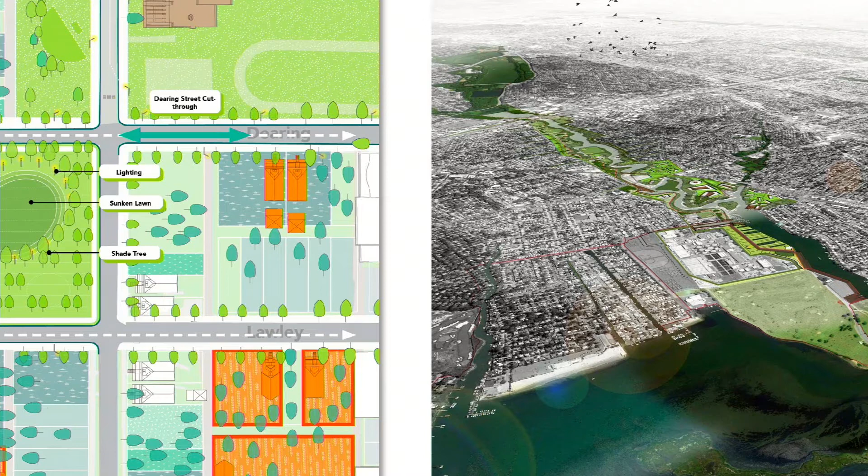What I'm going to show you tonight is a lot of urban public space work—public space interventions, public spaces, some of which you see here—planning work, larger scale master planning for cities, neighborhoods, and regions. A big aspect of our work is developing tools: design tools that make those planning processes more accessible, more democratic—design spaces and design objects that start conversations around planning and help generate discussion. That's something that has become really important to us, and I'll talk about that more in a bit.

First, though, about the reading aspect. I wrote down a quote by Iris Marion Young, since I heard this talk and your ongoing program is focusing on public space. I looked up an old quote by Iris Marion Young, who in the article 'City Life and Difference' wrote about public space as heterogeneous, plural, playful—a place where people witness and appreciate diverse cultural expressions that they do not share and sometimes don't even fully understand.

That sort of understanding of public space is quite important to us—to think of public space not as a space of unity, but as a space of difference, and a playful understanding and interaction of difference: different cultural expressions, different publics, and so on.

Now, for urbanists, the question is how can the built environment, the design of the built environment, support or increase, or play a role in that idea of the public sphere as one of playful interaction of difference. So that's something important to us, something we do in our work.

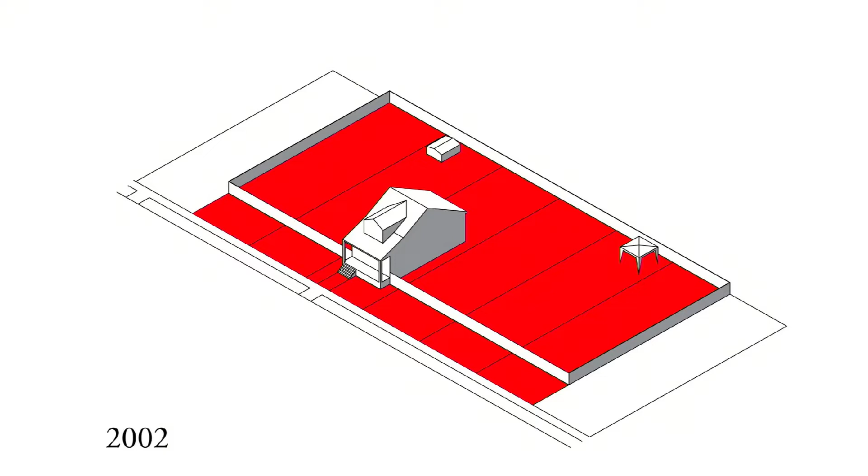Here are just some random examples of cadastral maps of the city. So these are blocks in the city. What's in red are those plots where homeowners expanded their properties, like these guys, the Misiks. Look at those, owning this entire block there. So the DNA, the structure of the city, the ownership of the city radically changes, but based not on a large vision, but on the individual actions of these people who are working there, people that don't have a presence in these large narratives of the city of Detroit.

So that's not really dealing with public space. You might say that is really about the owned land, but that is one of those aspects that we're really interested in: how does urban transformation happen through those small moves, those small spatial, everyday practices?

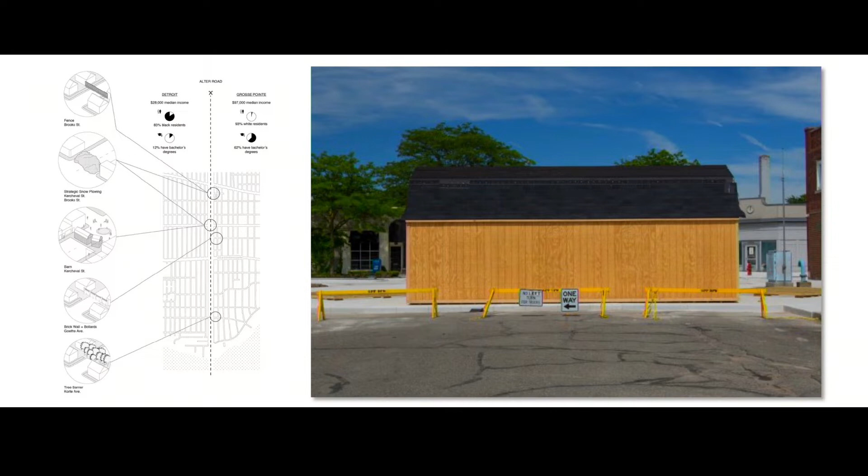So that was the first move. And then more recently, this shed was built, again right in the middle of one of the cross streets. It says there in the news flash: newly constructed barrier appears to separate Grosse Pointe Park and Detroit. So what is this barrier, what is this shed? It's actually, if you ask Grosse Pointe Park, this is a shed for a farmer's market.

This farmer's market is part of the idea of the suburb to become more attractive to young, white-collar employees. So the street was pedestrianized—you see a new curb, so what was a street is now a pedestrian zone, and there is a farmer's market there.

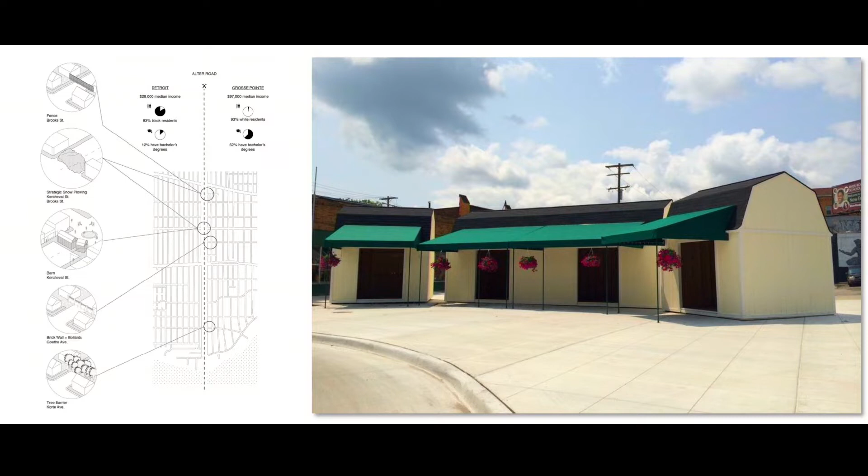This happens to occur just on the street that connects Grosse Pointe to Detroit. It's funny in multiple ways. One, I think it's interesting that here a tool of exclusion is something nobody could have anything against - pedestrianization, or Copenhagenization as they call it there. So you say, oh, this is great, there's now a pedestrian zone and this farmer's market, but the way it's used, or the context of where it is used, turns it into really a tool of exclusion.

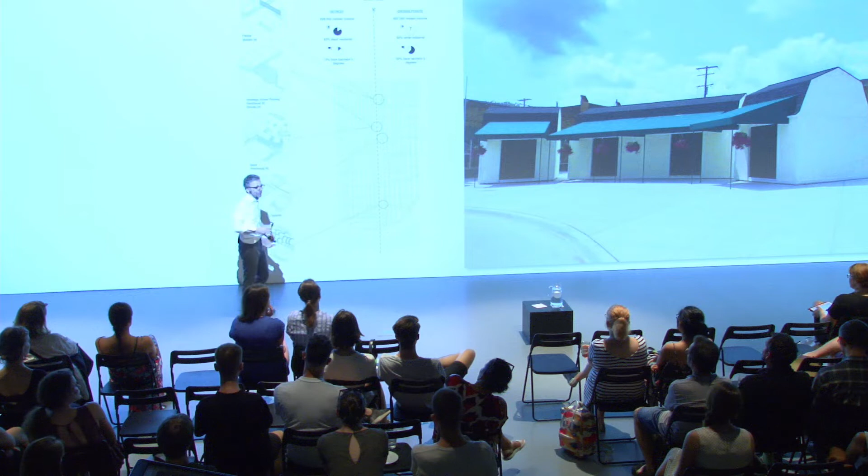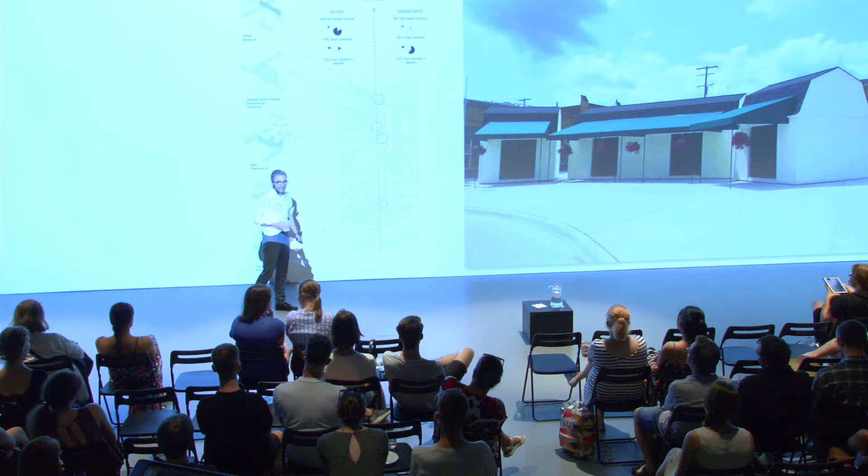Of denying access or denying connection between city and suburb. So that's one thing. It also talks to the incredible creativity that people come up with to exclude or to create borders without having to admit to it. It would be one thing to say we don't want poor black Detroiters in our city, and therefore we're closing the street off. It's another thing to build a farmer's market here in the middle of the street. So that's one artifact from Detroit.

So here the wall, this political artifact, really is not in the first sense a barrier to separate, but it's the symbol of separation that becomes valuable. And in this case, putting up the border allowed the developer to receive a federally insured mortgage and build the subdivision. Anyway, a historical artifact, a contemporary artifact, two built artifacts, two pieces of architecture, we could say political artifacts. The architecture talks to this purpose of excluding as part of this suburban-urban divide, or as an expression of a racist mortgage policy.

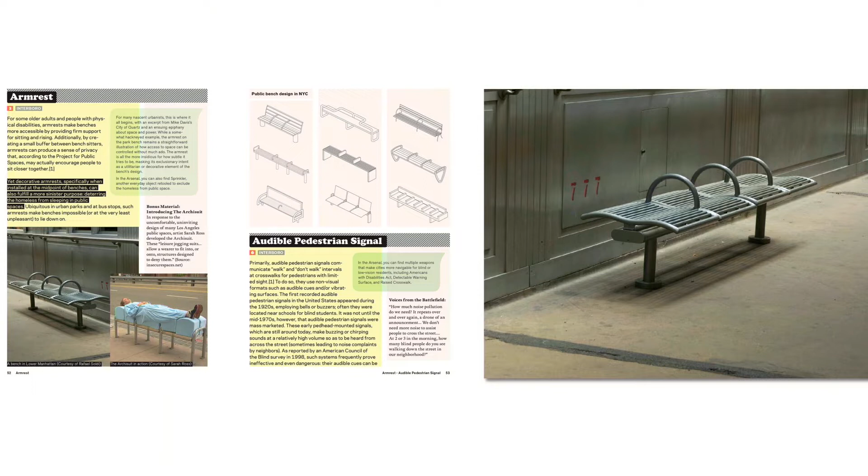Sidewalk management plans is another new euphemism for a municipal rule that deals with sitting down or not sitting down in the public sphere. So again, you see a lot of euphemisms in this arsenal of exclusion.

But of course, also in the United States, in places that are very car-based, something like a residential parking permit can become a very powerful tool. Again, here we're dealing with a municipal rule, but it can become a very powerful way of keeping people away from certain neighborhoods.

Another way of keeping people away from certain neighborhoods, or in this case from a shopping center in Maryland, where kids started skateboarding and the owner didn't like that and put in these speakers blasting classical music to keep those skaters away, because skateboarders don't like to skate with Four Seasons playing in the background. So you see the kind of creativity of the tools people come up with if they want to keep somebody out, but they don't want to admit to it.

But of course, many of these tools go both ways, and there are also some inclusionary tools. There's a whole history of regulations, inclusionary zoning, which is powerful, but also new inventions such as aging improvement districts to open up the city or parts of the city to people who can't walk that easily, and more creative tools like this map by a group called the LA Urban Rangers.

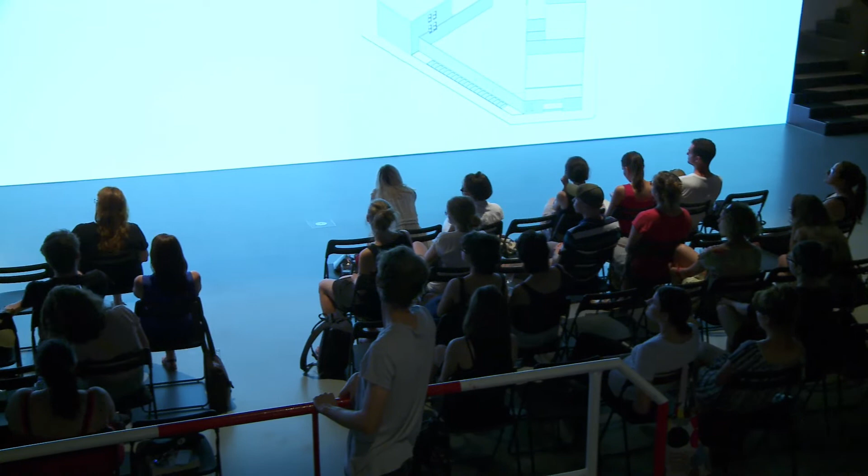During the summer season it's used for weekly events, really large music performances, with lots of people in this little courtyard. Given the shape of the courtyard, it gets pretty hot there, so the museum always commissions architects to create a shade structure—generally a pavilion, an environment for this thing.

Temporary architecture raises the question of what you design when the client pays for it, and what happens with all these hopefully beautiful things after the temporary event is over. We were thinking about this, and found the answer not inside the museum, but outside these walls.

You see those concrete walls here, and this is an outside view. There's the wall of the museum back there. In the foreground is a little shade structure built by a taxi cab company. A bunch of taxi drivers park across the street from the museum, change shifts, and repair their cars. While they do that they can rest here, take a break, hang out. In summer there's shade, some plants and chairs.

When we saw this weird little space, we thought it was interesting because the programmatic requirements of this public space were pretty much the same as the museum's requirements: a place to sit, a place to hang out, some shade, some plants. So we thought it would be a good idea to create a kind of match between the inside and the outside, between the space of the museum and the neighborhood around it.

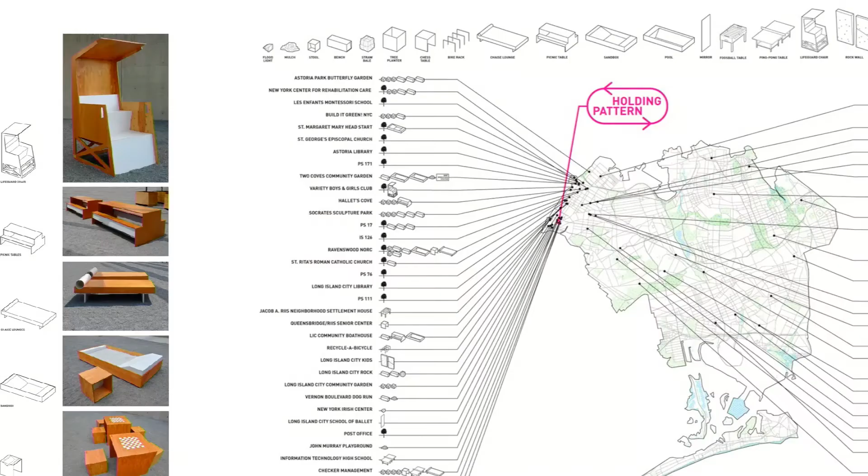And here you see where all of those things went. This is the borough of Queens, one of New York City's five boroughs. You see this project, even though it's small and really just dealing with this small public space within the museum, actually spread throughout the entire borough, because our clients—50 different clients instead of one museum—were all over the borough. Here you see some of those spaces: everyday spaces, little front yards, parking lots, and so on.

Here, this guy, if you look all the way over here, is one of the Teamsters, which is like a trucking union. They have their headquarters across the street from the museum, and they wanted some trees and some outdoor furniture. So we got the trees, stored them in the museum—it was a very nice little temporary forest over there—and then here you see the tree planted in the Teamsters headquarters parking lot in the fall. While in the museum, each tree had a little label that said who owns this thing. It's about creating those connections.

Or these guys, the Long Island City School of Ballet, needed new mirrors for their ballet studio. We got those mirrors and installed them in the museum in this sort of pseudo post-minimalist installation, and then in the fall these mirrors were installed there. However, while they were in the courtyard of the museum, they were the setting for lots of programming—the ballet school did quite a bit of programming in that space, dancing there as a kind of gift exchange: you get the mirrors, in exchange we give you these performances. It's an interesting way in which the built artifact, the mirror, starts playing a role beyond just sitting there as architecture, becoming a moment of exchange and conversation.

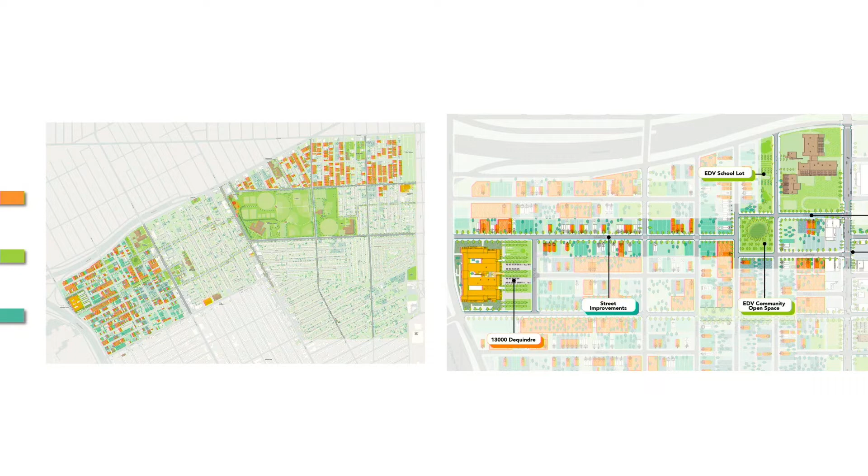These divisions have partially to do with the history of the grid - the urban morphology. There's a whole history, since we're in Detroit, of racist planning policies, and the development of a grid that has incredibly long blocks with very few cross streets.

So our proposal, our work, is really about increasing access in a very direct way, reusing this moment where a lot of the city is vacant, and the city actually owns a lot of property because much of this vacant property reverted to the city. The fact that the city owns so much property gives the opportunity for large urban design moves, urban plan changes, adjusting the urban grid in ways that wouldn't be possible under normal circumstances.

A lot of this work deals with vacancy, the question of what to do with land - what you see here in green are parcels that are city-owned. We propose a series of programs: setting aside some land for larger infrastructure measures, reserving some for neighbors who are still living here and might expand their property along the lines of what you saw at the beginning. Then there are some parcels left, shown in orange, for which we propose a bundling program where multiple parcels are put together and sold off to people or organizations who can use these larger lots.

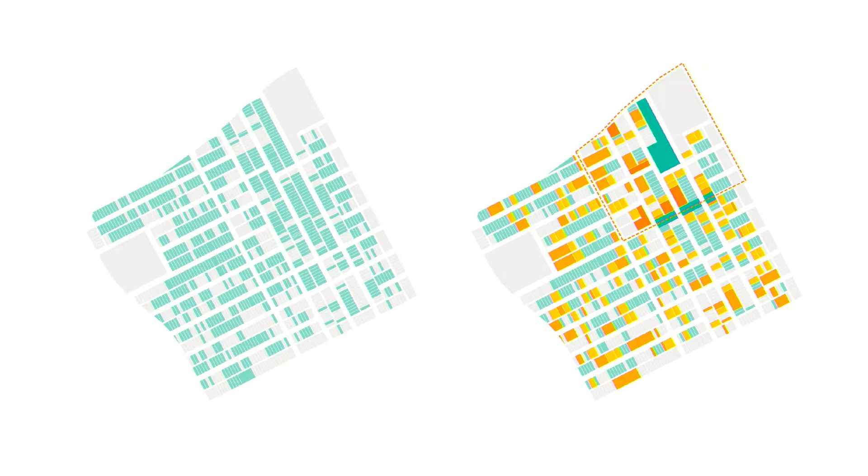This is one of the organizations working in the neighborhood that can make use of such a program - a collective of Bengali women who garden in their backyards and sell the produce. This is their block, and they're running out of space.

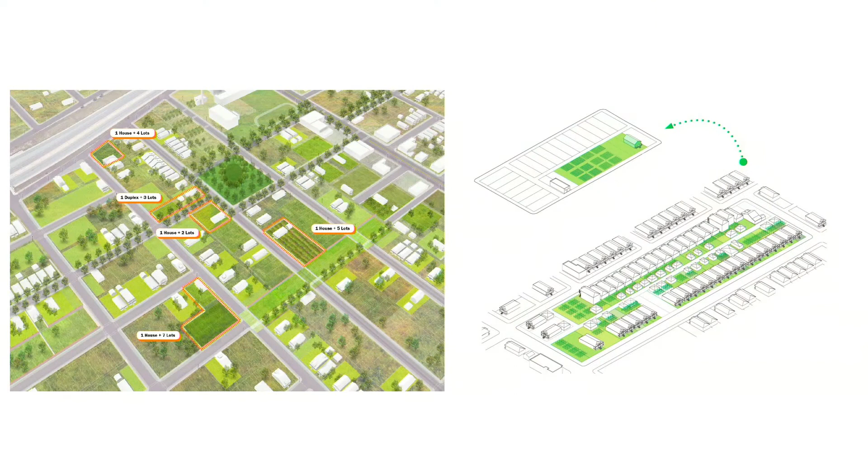And so they can acquire one of these larger lots, and the plan is to have a larger farming operation and to also create an industrial kitchen. So these are ways in which we, as urban designers, by changing the size and shape of parcels, can support such bottom-up initiatives or businesses like those guys.

One aspect I wanted to quickly show you is, again, this neighborhood has a lot of vacancy, and a lot of this land is city-owned, but also stewarded by people who are still living there. Some have expanded their parcels, but they also take care of a lot of the city-owned land—they mow the lawn, or use it for a party. So they have some form of informal land tenure. They don't really own the land, but they're stewards of it.

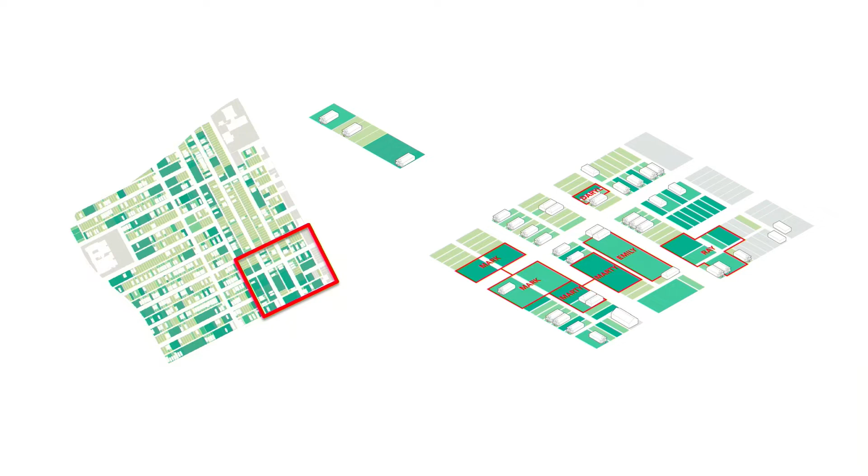As the city is thinking about disposing of this land, selling it off, of course those people should have some sort of say, or some ability to acquire the land or to keep it. But who that is, is something you can't really find out. There's no data map, no cadastral of land stewards.

So here, for example, in this little piece of the neighborhood, you see who uses or who stewards which land. Mark owns a property here, has expanded his property, takes care of that. Marty takes care of this. So there are these kind of invisible or informal networks in the neighborhood that are really hard for us as planners from the outside to understand.

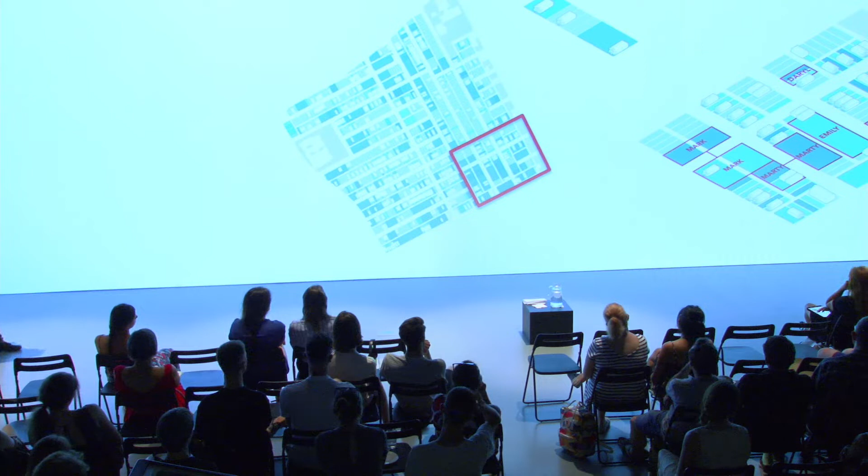That's a kind of local knowledge you can't find in a database, and that you have to acquire by talking to people—in formal meetings, in informal settings, in specific settings. In the context of the Bengali community, this is a meeting specifically for women, but also on the street. And that's in order to be able to talk to people who don't come to any community meetings—here we decided to use the tool of an ice cream truck, which is a very everyday piece of infrastructure in Detroit, particularly in that neighborhood.

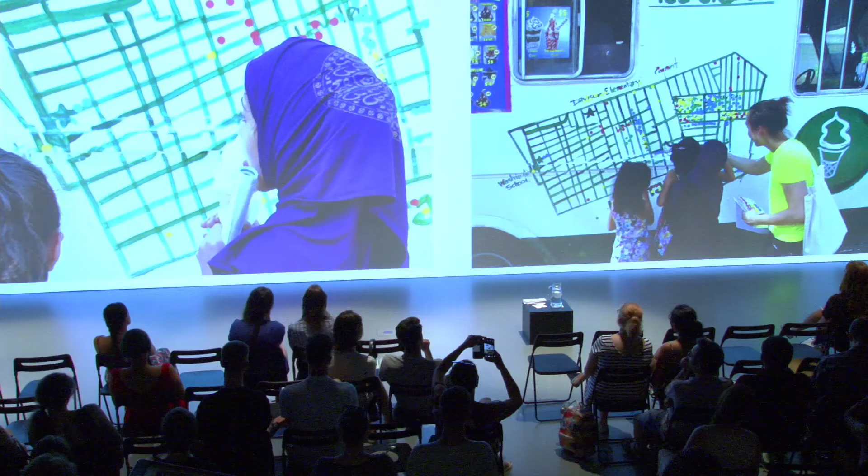So you see these ice cream trucks driving around everywhere, and we appropriated one, took one, and turned it into an engagement tool. So this is an ice cream truck plus a map of the neighborhood that allows us, as outsiders, to gain knowledge of the neighborhood by talking to people who would never show up at a planning meeting, but who are walking the few steps from their home to buy an ice cream, and are happy to share their knowledge, especially since they're getting an ice cream for free in exchange.

So this is just one example of the way we're using design, or design objects, as part of a planning process—to acquire knowledge, like in the case of the ice cream truck, as a way to use carefully designed objects to create temporary public spaces, spaces of conversation, spaces of knowledge transfer that allow more people to participate in processes they usually wouldn't participate in.

So this is the ice cream truck. This is a model of the city of Cambridge. We're working on the comprehensive plan for the city of Cambridge, and as part of that, our experience is there's a community meeting, and always the same people show up—namely those who have time to go to a meeting, who don't have to pick up their kids from school, who are able to set time aside to come. And so through these meetings, we're missing a huge part of the population, namely those who don't have the time, who don't even know that processes like that are going on.

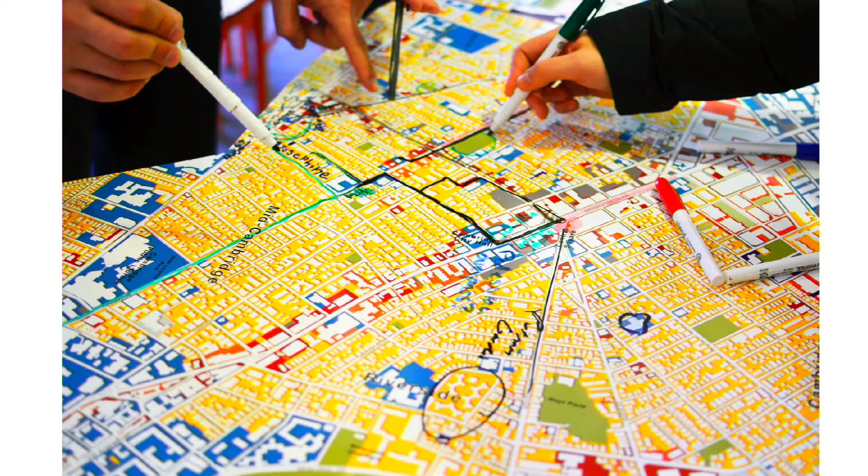And therefore, we're designing objects that we can put out there, like this model—a table of the city of Cambridge with chairs representing the neighborhoods. And so this thing travels around the neighborhood in a van, going to the sidewalks, going to public libraries, as really a kind of conversation starter to gather information about people's everyday lives, but also to have a conversation about things like zoning and planning that are often thought of as expert knowledge, but really, everybody can talk to that.

Everybody has an idea of what the city is and what it should be, and how we should shape the tools to get to that state. So that's another part of our participatory work: not only to gather information and start conversations, but also to demystify planning. To say, okay, this zoning is not that hard, it's actually a really dumb, simple tool, and it's something you can take part in changing.